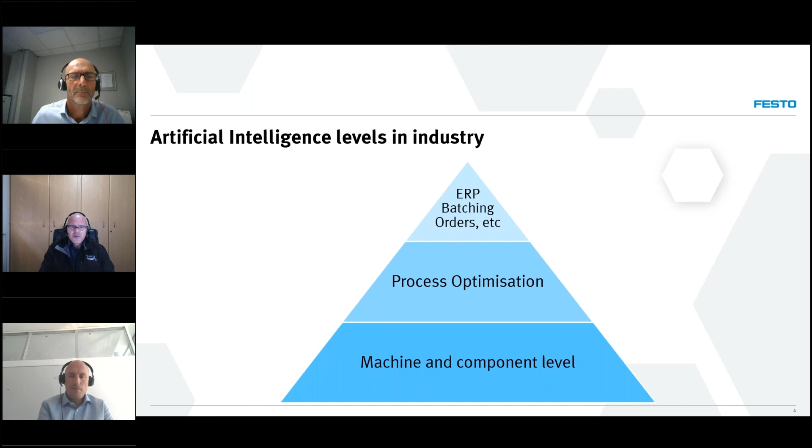But where Festo's offering really comes in is that bottom end, that machine and component level. By implementing an AI algorithm, customers now get a preemptive warning for pending failures, whether it's an anomaly that appears, or maybe a cylinder or a motor is deemed to be starting to fail. It's going down in its life cycle, or its health score, which Sebastian will take us through a little bit later. How much do you actually lose in percentage of profitability on not being able to prevent these types of failures?

So I'd like to just give us a quick rundown of how this AI actually works. What we do is we take the data that's already available on the machine, whether it's on PLC level or on the sensor level. We take all of that data in and we apply it to what we call our AI algorithm. Whether you're taking live data or stored data, you can apply it to the algorithm, and we still have the human in the loop feature where we take the data, we then, of course, teach the model what we want to get out of the model, and we also do data validation.

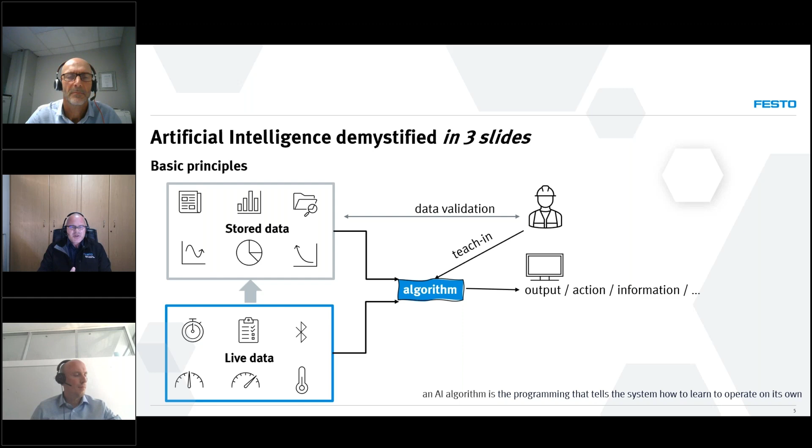So let's say you get an anomaly. In the beginning, the human still needs to identify or classify this anomaly, whether it's standard. So if you imagine adjusting the airflow, your parameters have changed, so the human has to then accept it to say this is a different parameter. Let's say you're running a different product or a different SKU.

So previously, there used to be so much data available that we didn't use. If it wasn't necessary for the process at the time, you wouldn't either display it or maybe use it in your process. Now, this is where we take that data, whether it's either supervised or unsupervised, and we classify the data to give us anomaly detection and, of course, look at what risks there are. But over and above that, how does that work? So we've broken it down into a few simple steps.

So the first step is to take this data. So of course, in all operations, you've got sensors, you've got motors, you've got all sorts of data that's available there, whether it's a temperature, speed, pressure, flow. We take all of that data and we aggregate it, we put it together.

Then the second step is what we call the pre-processing. So before we send these tons of data into an AI platform, we try and clean it up a little bit to get rid of things like white noise and a waste of unnecessary data, because of course that'll cost again.

So then the data transmission, this is where it's taken from, let's say, the PLC via field bus. Let's say you've got a Siemens PLC, then we'll take it via Profinet up into the AI algorithm, whether it's in the cloud or maybe an on-prem solution. We take that data, either OPC UA or perhaps MQTT, and we then take the data towards where we will then start to interrogate the data.

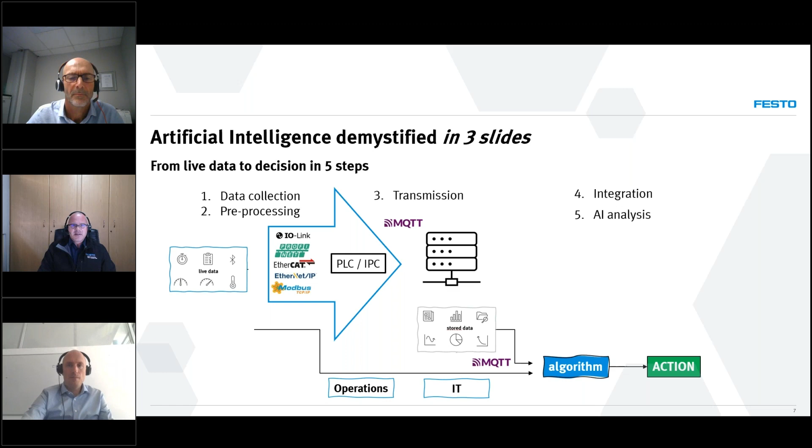So hopefully that's just, I don't want to say demystify, but just giving you a quick rundown, the layman's terms of how this AI algorithm actually works. But Sky, the question to you is, where do you see the biggest benefit for customers to apply this?

Well, it's really at the factory level, at the machine process operation. And there's three factors that determine your overall performance and quality. The first is OEE, which is your overall equipment effectiveness. And here it's a measure of the effectiveness of your machine, broken down into three factors, which we'll dive into just now.

The next is energy, and here it's an expression of the efficiency. In other words, what resources does your machine consume? Steam, power, compressed air, etc. And the last is safety, and here it's about lost time incidents.

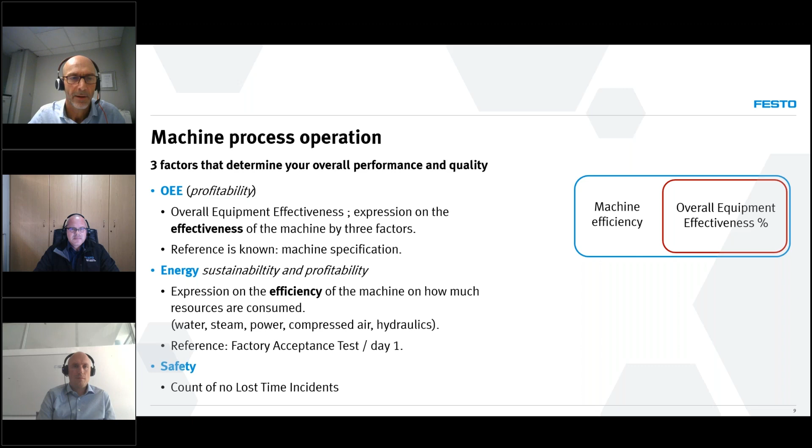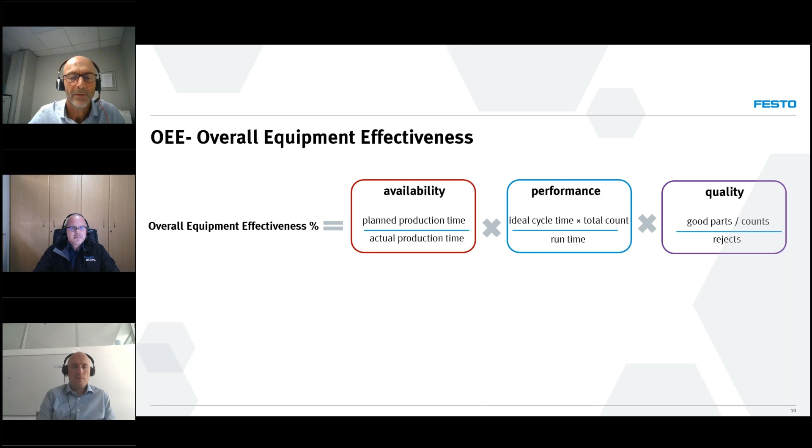If we dive deeper into the OEE, overall equipment effectiveness is measured in percentage, and ideally we want to get as close to 100% as possible, which isn't necessarily achievable, but that's what we stretch for. If we look at the OEE, it's divided into three main factors: the availability, the performance, and the quality that your machine is producing. So it's the availability times the performance times the quality, and the result is in a percentage.

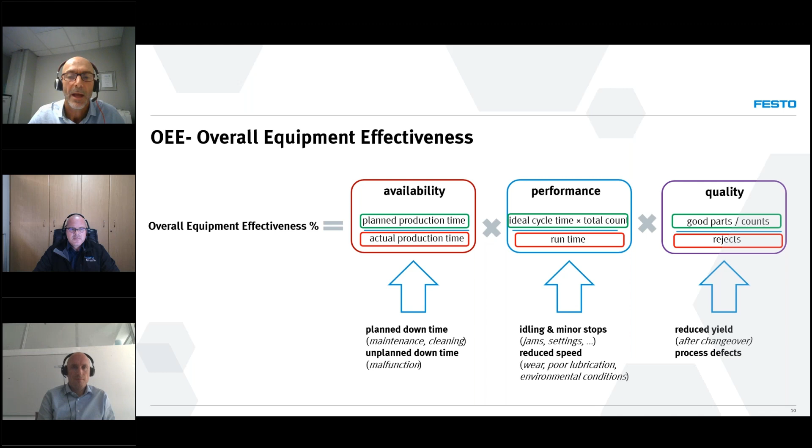Under availability, it's all about planned downtime, unplanned downtime. On the performance, it's about the idling and minor stops and reduced speed that can impact there. And on the quality, it's of course the reduced yield and your process defects. Keeping that in mind, how can we influence this?

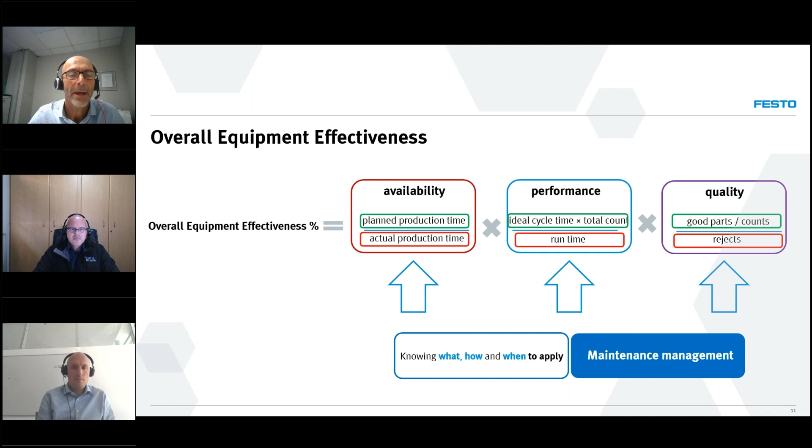And it's pretty obvious that by knowing what, how, and when to apply our maintenance management, we can have an impact on our OEE. So if we talk about maintenance, what do we mean by that? Maintenance is all about striking a balance between cost and effectiveness.

We all, in the past, I'm sure, if we're involved in a production environment, have applied a lot of effort sometimes into certain maintenance and got very little return with regards to effectiveness. So if we look at the maintenance itself, we can define it into 5 different types. The first being reactive, which is pretty straightforward. The part breaks, we stop the plant and we change the part.

We then have preventative, where the part, we believe from experience, lasts, for example, 5 months. So at 4 months, when the plant is down, we change the part, anticipating that it's going to break soon, so we'll just put in a new part. We have condition-based. This is where we set certain alarms. And then we have the real focus today, and that's the AI on the predictive and the prescriptive.

So if we were to have a look into that, you should be asking yourselves, what if the part unexpectedly fails? And that's how you decide which one of these maintenance types to apply. We don't want to apply AI unnecessarily and spend all of that money. So from experience also, which failure has the highest impact? And what do we mean by that?

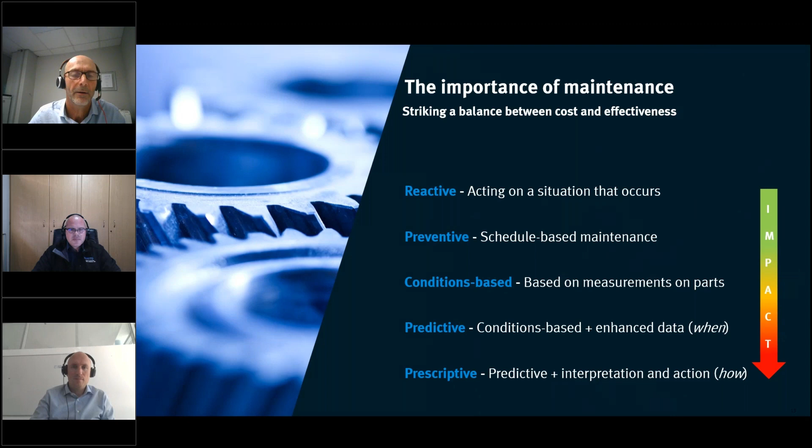So Sebastian, will you take us into a little bit further look into machine maintenance and the role of AI? Sure, thanks, Guy. So if we look at that guy, a maintenance engineer generated by an AI algorithm, what's on his mind? So generally, the main task is, how can I optimize my maintenance process to ensure the best possible technical availability? As Guy was introducing already, availability is one of the factors of the OEE, and optimizing that really has a clear benefit on the well-being of the production and at the end the outcome of the production.

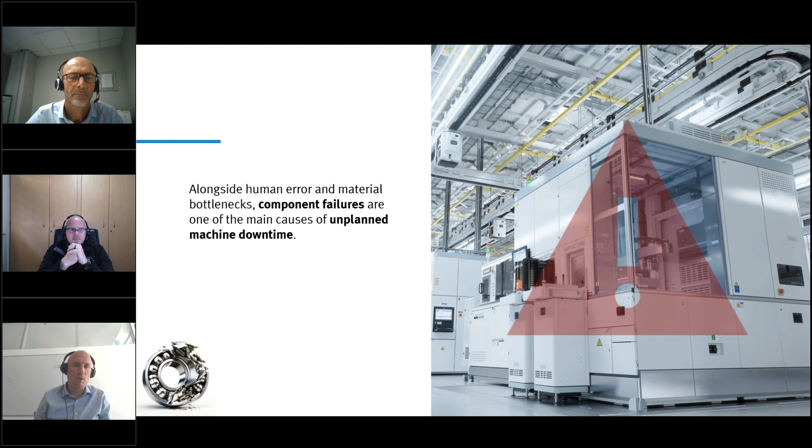So studies and also experience that we have in our own factories have concluded that alongside human error and material bottlenecks, component failures are one of the main causes of unplanned machine downtime. So for sure, there is human error, there's material bottlenecks, etc., but component failure is one of the key causes of unplanned machine downtime, and this attributes to 5 to 20% productivity loss. So that's quite a huge number to work on. Even if it's on the lower side, on the 5%, this is really something we're working on, and introducing solutions really has a clear benefit.

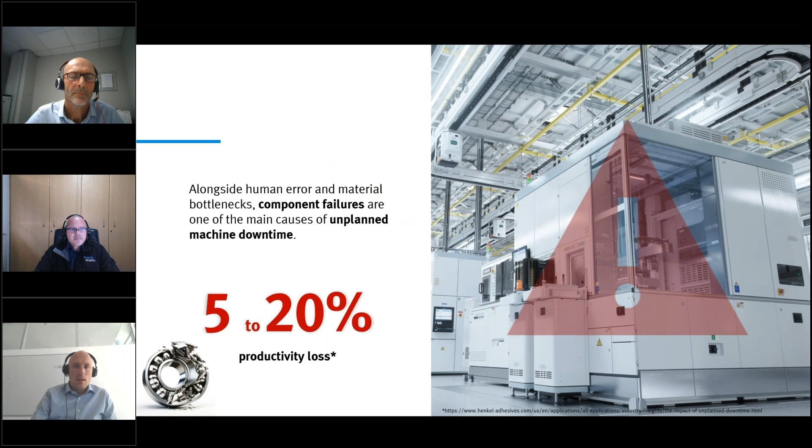Preventive maintenance can make a good impact on that, but we are maybe too early, or we might be too late. So it's just about optimizing the cycle. Condition monitoring and having good thresholds already can help you prevent the failure. That's for sure possible, but the promise of predictive and prescriptive maintenance, also with the AX industrial apps that we're introducing, is to have it really early in the degradation of the asset health, to react in a planned time window in which maintenance has to replace or repair a certain part.

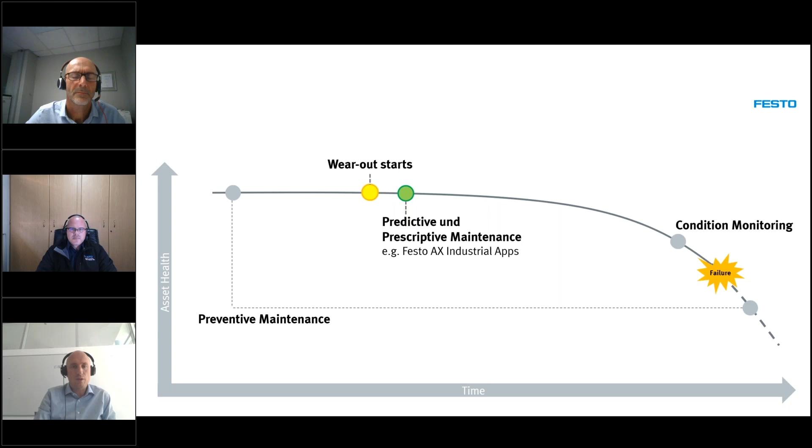We've done these solutions. Everything that we talk about in the next minutes, we use these solutions in our own factory. Festo is a global company. We have global production facilities. One is in Germany, we have in Asia and so on, and then in South America and so on. So we are using these solutions and we are seeing the benefits of these solutions in our own factory.

And this is one example where we applied our solution, monitoring a pneumatic cylinder inside of a drilling machine, a Chiron drilling machine, for the cylinder that moves and opens and closes the tool plate. While we are not really monitoring the cylinder, at the end we are monitoring the cylinder, but it's more about the guiding that the cylinder actuates. And this, due to dust and metal, like the drilled metal, etc., gets stuck from time to time.

And by applying this algorithm and our software, it's possible to be really early in the maintenance process and notifying maintenance teams about something to be happening in the future. And if they react fast, we see cost savings, and we've seen that throughout the last 2-3 years that we have installed the solution. We are saving up to 15,000 euro of standstill costs and maintenance costs by this one machine alone.

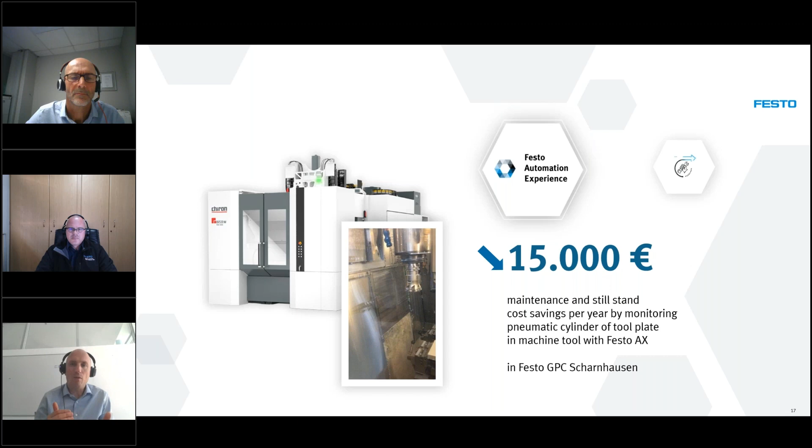Now you could argue that this is in Germany. We are a high labor cost country. Still, if you reduce the labor cost of maintenance and maybe the downtime costs, because maybe the downtime is not so expensive, if we say 1/10 of it, 1,500 euro, it will still be a great ROI in a few months of this solution alone on one machine. So it's always about how fast can I have an ROI on that solution and what does it bring to my production line.

The benefits, and Guy already mentioned it, and Marcus as well, is we want to increase the machine safety. Well-running components are essential for machine safety. We want to have less unplanned downtime. That's the overall goal. We want to increase the asset lifetime. We want to use the component until it's really in a bad shape. There's no need to replace it earlier, maybe. So we can increase the asset lifetime, also reduce inventory costs because we only need those parts that are really going to be failing in the next few days, maybe.

At the end, it's also about a shorter mean time to repair, knowing what part is wrong, where do I need to look. This all helps me to reduce my mean time to repair, one of the key metrics for maintenance teams.

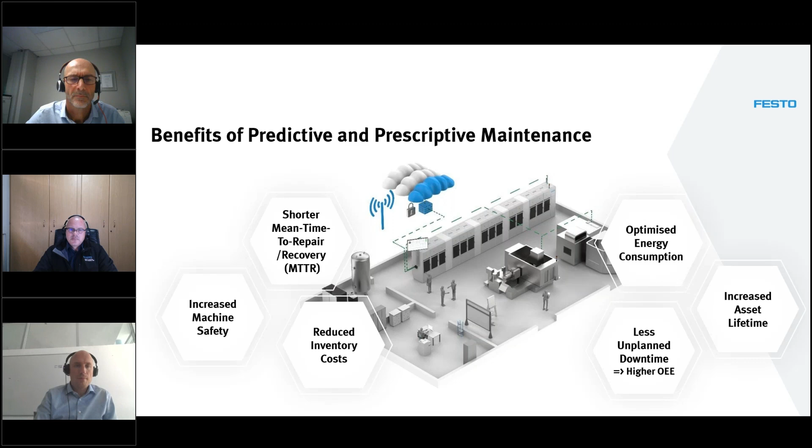Now, when we are looking at how do we use AI in manufacturing, and this is also what we did in the past and what were our expectations and what did we experience, we feel like, okay, we take any process in manufacturing, we apply some kind of AI magic on it. At the end, there's more magic to it, and there will be a value generated for the production. The reality is we need to find suitable processes. Only then we will see benefits. Suitable processes are where we have cost effectiveness, where we have data available, where we have a problem. You don't want to spread it on all processes. We want to be really cost effective and have this applied on processes where we can measure it also.

We need solution engineering. Sometimes it's not so easy to get the data from machines, and maybe these are old machines, legacy machines, etc. We need to know which data we need to work on a certain problem. We need maybe some sensors, actuators attached to it, not always, but we need to work on the solution with engineering capabilities. Next, there's data science, where we think, okay, now we have that data, what can we do with it and how can we make a change?

And in the end, we will have a value, hopefully. We want to establish that value. We want to make it transparent for everyone. What does it bring? We want to take people with us, maintenance teams, all the other shop floor people into that solution. And there needs to be change management, because sometimes the usual processes need to be changed to have these solutions implemented. You see, this is quite a big process that we are opening. There are a lot of disciplines in it, so it feels like this is really complicated.

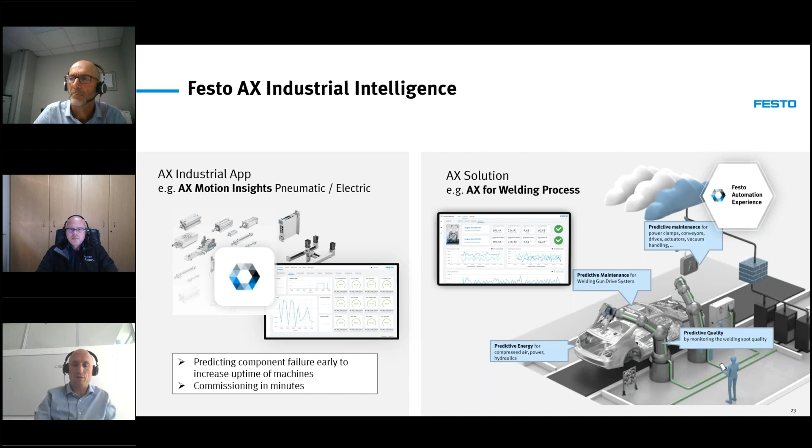And on the left side, we see where we really have achieved scalability and standardization, which is our AX industrial apps. We call them industrial apps, which are pre-built packages for you to take and install in your machines without having to go through this entire process. Now, let's look at a pneumatic actuator. That's what we are famous for, and that's what we bring a solution for.

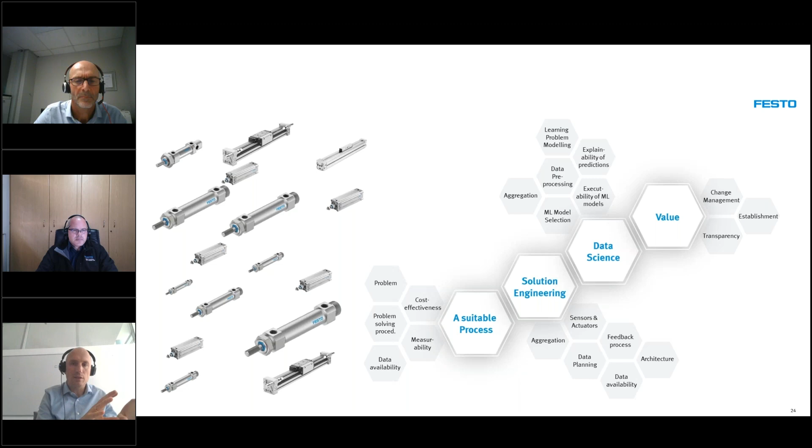When we monitor that and we saw these process steps, like we find a suitable process, we want to monitor pneumatics because we feel like they are one source of downtime maybe on my machine. I want to monitor them and I want to be able to react early on possible failures of these components.

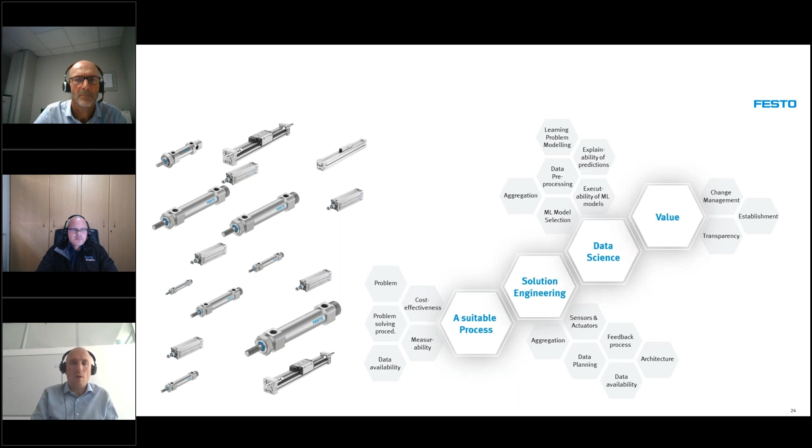Now, I see these whole steps, and what we've now achieved and what our solution is, we've taken this entire process and bundled it into this application, so you do not have to go through all these steps on your own, but this application packages it for you and has it pre-built, and you more or less have a simple solution that you can install that takes away the individual effort for this specific use case,

and you have the AI model that is capable of monitoring, predicting, and making anomaly detection on a pneumatic cylinder, where you have everything from the connectivity. You don't have to worry about it. We see that in a few steps, and we have a nice user interface where you can also work with the application.

So now let's dive into that. Let's say we want to do that. You feel like, okay, this is a nice solution. I want to implement, I want to monitor pneumatics in my machine. This is the topology of the application that we've shown. Now it's a bit more technical.

On the right side, you see the automation topology, where you have a PLC, you have valves, you might have a valve terminal, and at the end you have cylinders that you want to monitor. For this solution that we are presenting, we need limit switches on these cylinders. Standard, you have 2 limit switches, that's what we need. There's no need to install any more sensors. This solution works with everything that is installed on the cylinder, 2 limit switches, that's what we need.

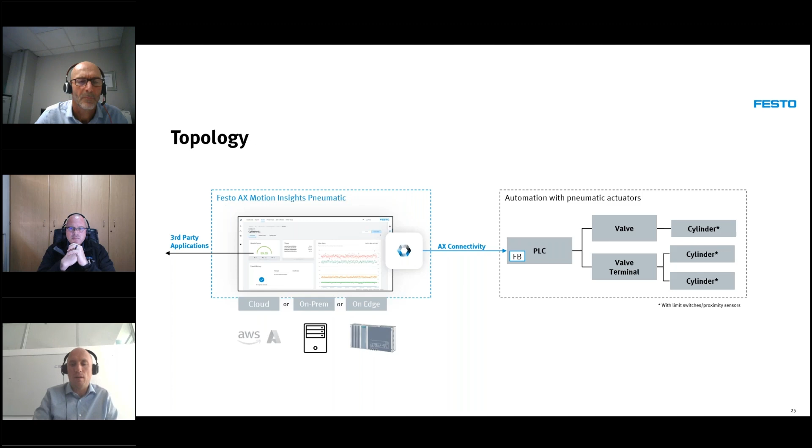I feel like OEMs and machine builders might want to have it on an industry computer running next to the machine, running this industrial app parallel to maybe some other applications on that industry computer, and then monitoring these pneumatic cylinders. So where you run that is totally up to you. Basically, you need an industry computer, some kind of computing device to run our solution on. So at the end, you need a pneumatic cylinder, you need limit switches, and our Motion Insights Pneumatic industrial app to be able to monitor pneumatic cylinders.

Now, what we see here, diving in, is part of the process steps that you need to do. You need to do some simple steps, something that you or your control technician do every day: install a function block into a PLC. And this video shows you how this is going.

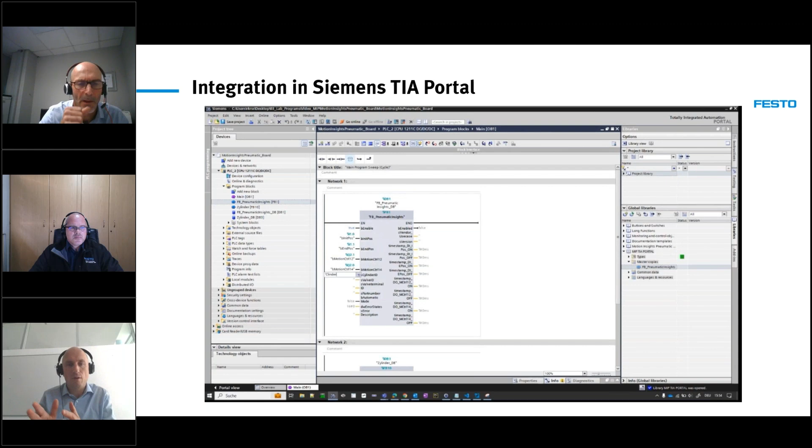We will not dive into the details of the function block right now. We have a great application note, a PDF document describing all of that in detail. It's just about showing you that this took us like 10 seconds in the video. It's a bit fast forward, but it's about 30 seconds to 1 minute to configure that function block per cylinder, and then you're ready to go.

This function block, there's not too much magic happening in it. It's basically doing some time stamping on cylinder movements and providing that data later for our application to collect it from the PLC system. We will provide these function blocks for all major PLC systems, starting with Siemens. Rockwell will come now, Beckhoff, and others will be provided via OPC-UA.

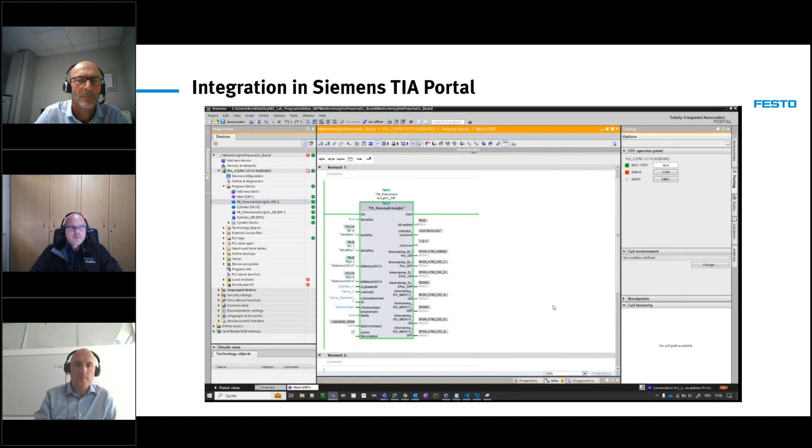Once we've got the function block installed in the PLC, now we are diving into the application, and this is totally being done by a wizard guiding you through the connectivity steps. What we want to show you here is that this is not really expert usage of a software. You basically need to provide some simple credentials, IP addresses, some configuration parameters that you get from your PLC and from your network topology. So we are guided by a wizard through this application.

The video is not playing. Let's go back again. Get it to play this side? Yeah, that would be nice.

Thanks, Marcus. So we see we are going through a connection wizard. We are entering an IP address of the Siemens PLC in that example, some information that you get from TIA Portal, entering the credentials to our application. This is all being described. And then at the end, you're ready to set it up. And then you're going into the application that is running on your computer.

You need to run the machine. And from that point on, we need 300 cycles of the machine doing its normal job, of a case erector building up cases, of a palletizer, or whatever the machine is doing. You let the machine run, we need 300 cycles, and you see the progress bar at the bottom. The algorithm learns these 300 cycles of normal data of the machine, and you're good to go.

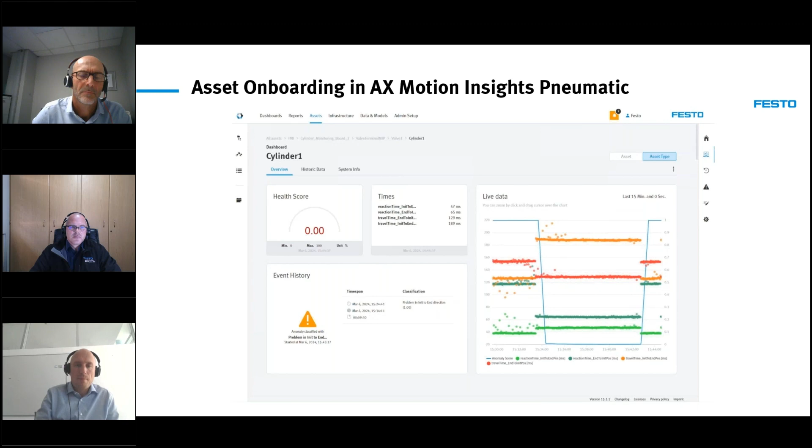So our industrial app, Motion Insights Pneumatic, is there to avoid unplanned downtime by continuously monitoring pneumatic cylinders in a machine for wear and other anomalies. This is a ready-to-use package, what we just described, including the connectivity via the PLC. You do not need any data science expertise or anything else. Basically, you need the expertise to install a function block in your PLC.

The function block, we described it. We have all the parameters described. You need to install this function block in the PLC. Right now, there's no other way to provide the data. Going through the PLC is, in the pneumatic scenario for pneumatic cylinders, the only way at the moment to get the right data. But it's easy commissioning in minutes instead of days and having long projects.

As you can see in the picture, this works for Festo cylinders. It also works for pneumatic parts from other vendors. So whatever you have in your machine, Festo provides a solution to monitor pneumatics in your machine.

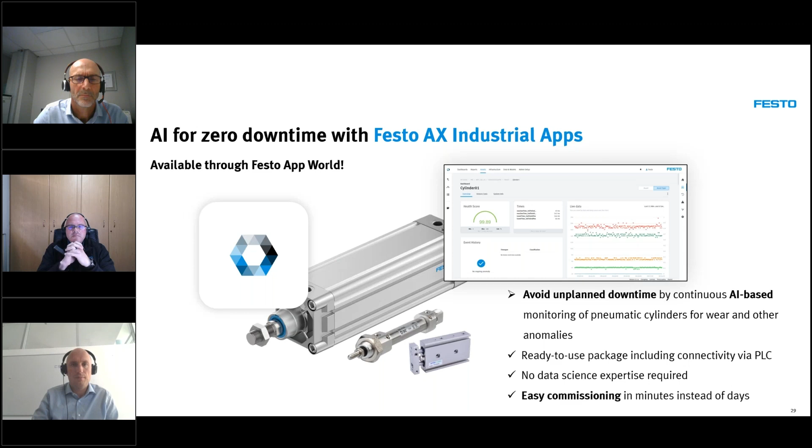If you ask yourself, that's great, how should I start? We say, pick the right cylinders to monitor, put it on the worst cases, and you will have a fast ROI on that solution. As Sky was mentioning, look at where there's a high impact on product quality, on downtime costs, which are the cylinders that are not frequently replaced anyways, or that are difficult to access. Maybe they're somewhere deep inside the machine. This is where really there are the low-hanging fruits.

Where to look? Maintenance logs. If you're an end user, a production, a manufacturing company, you might have maintenance logs. This is a good place to start your search. If you're a machine builder, think about where the crucial, the critical parts, the bottlenecks in your machine are to apply this on and to provide this to your end user at the end.

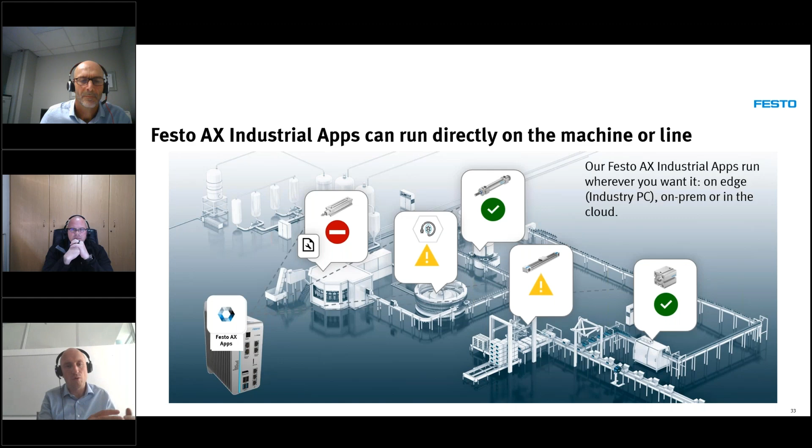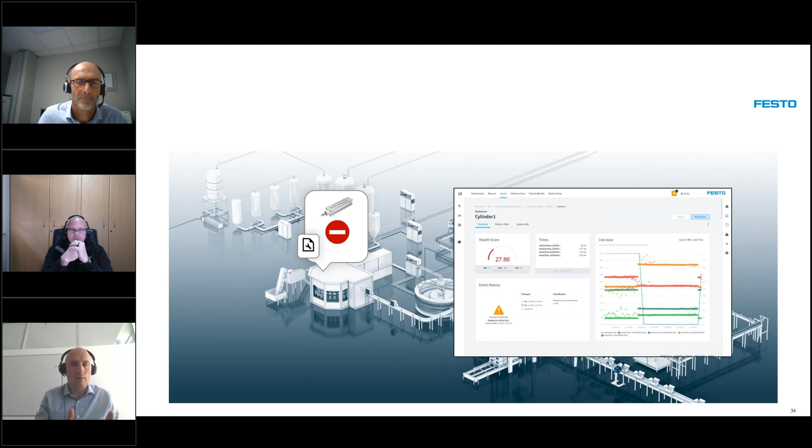If you have that, and you think about what should I do with that, I don't want to look at a dashboard. That's not what maintenance teams are doing. They're not looking at dashboards. They are working on incidents. They are doing other things, but not looking at dashboards all the time. But you could also integrate that into other IT systems. You could even integrate it into an HMI, for example.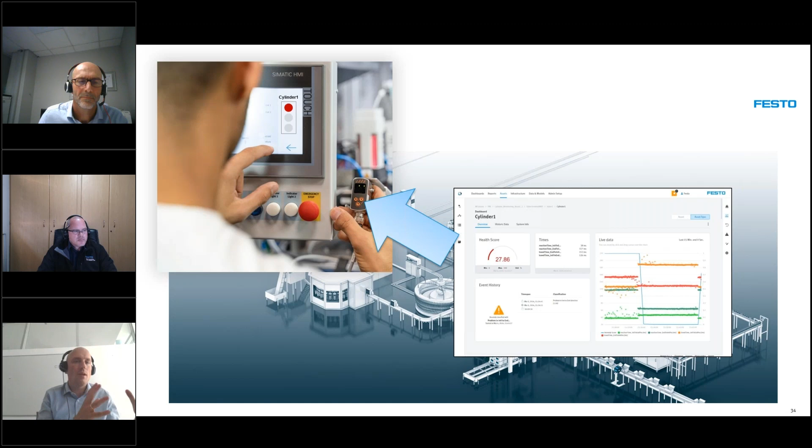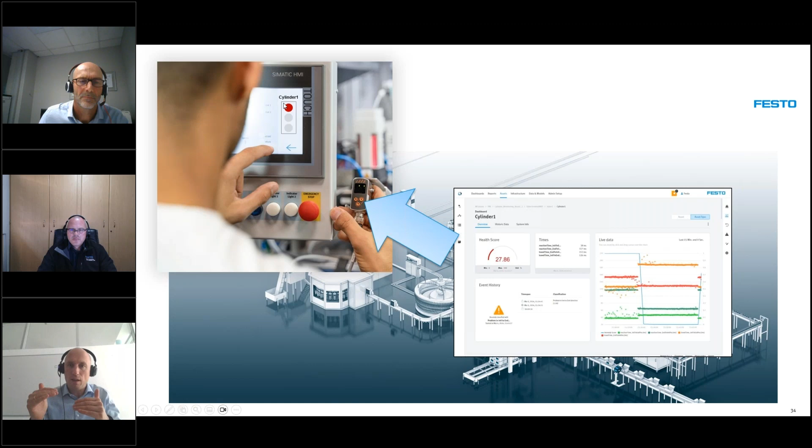And whenever there's an anomaly, you see that on the right side in the dashboard, it's going down. And you see that then maybe as a kind of traffic light on the HMI, which notifies the operator, who then can notify the maintenance team, or you directly have an interface from our application to the maintenance management system and notify the maintenance team about something going wrong here and something to react on.

So there's benefits for our OEM customers and end user customers with our Festo AX industrial apps. End users, we've seen that they can transform into condition-based maintenance, predictive maintenance, and so on. They can take these solutions to follow their strategy, going away from reactive maintenance to more condition and predictive maintenance. It's about improving the overall equipment efficiency.

But also machine builders can bundle that for their machines and sell the software package as an add-on for their machines, and or improve field service activities with it by being early notified about something going wrong, etc. So OEMs can build the solution into their applications.

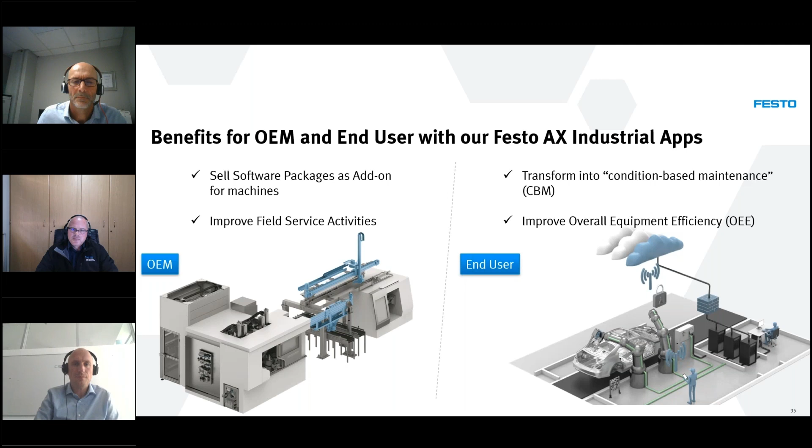They can prepare their machines, being capable of running it, prepare everything, install the function block, sell the machine, and maybe also at a later time when the end user says, oh, I'd like to have some of these industrial app features, these monitoring features, then sell a license to the end users, activating the AX industrial app while it's at the end customers, and then have a second business afterwards.

If you're deciding to go with other platforms, I know Siemens has quite some interesting offerings, Industrial Edge, that's what they're calling it. We will bring these solutions to other platforms as well. So you will find Festo applications on other vendors' platforms like the Siemens Industrial Edge, which is an industry computer plus some app store, etc. You will find our applications in these systems as well. So whatever you decide on, we want to help you on your preferred platform and your preferred system.

Maybe if you implement this solution, and now we are jumping a bit, think about a nice and easy way to do maintenance management. Say you have implemented the industrial app and you want a great tool to do the maintenance management itself, handling of the incidents, etc. And as a nice add-on feature, a quick way to diagnose faults on your Festo components, having access to manuals, etc. And this is our AX maintenance solution.